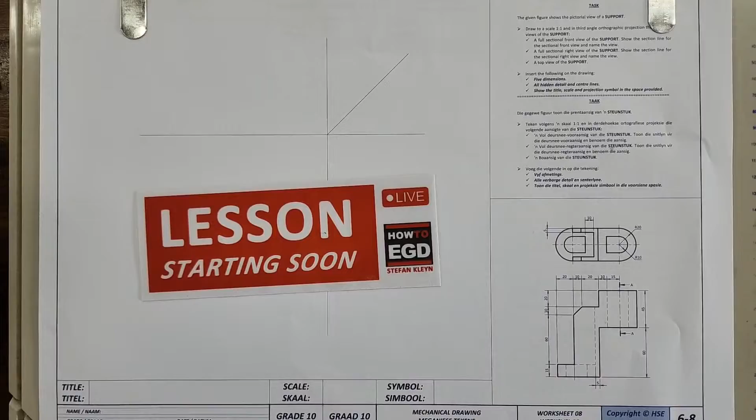Alright, grade 10s, here we go. We are on page 6-8 of the HSE workbook.

They've given us a top view and a front view, and we are drawing it in third angle orthographic projection. We're having to draw a full sectional front view as well as a full sectional right view and the top view of the support, with dimensions, hidden detail, title, scale, etc.

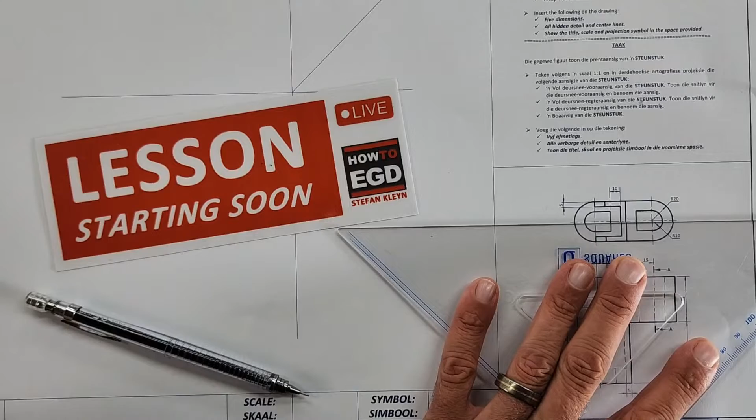Alright, let's just look at this quickly. If we put in our cutting plane here, a full sectional front view, that cutting plane will run through here, yes or no? And the arrows at the end will be on this end.

So if we cut through the support, everything on the side of the arrows will fall away. So if we look at this here, everyone look up at the board.

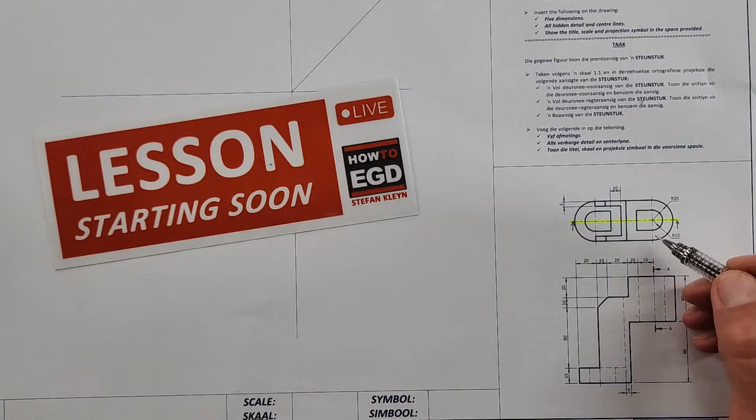This here is a hole going through. Do you see that? That hidden detail lines up, that hidden detail lines up, that center line lines up. So we have a hole going through here.

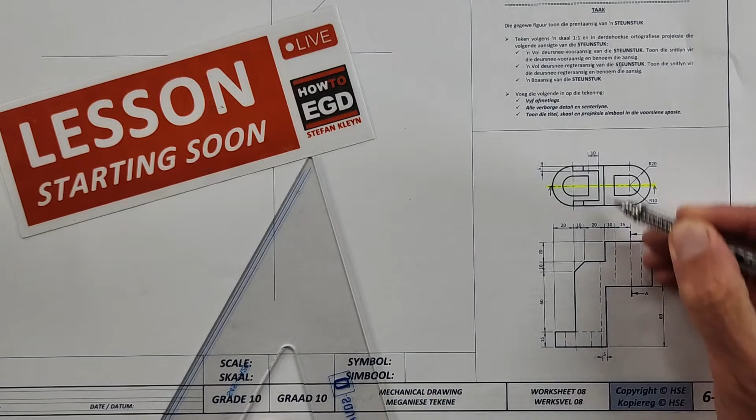Then we have a support part here. This is almost like that cut out there. Do you see that line? This is the corner. And then we come all the way down, and then what we see here is this part.

Here at the bottom, another hole there. That hidden detail is this. Do you see that yourself? Are you able to figure that out yourself?

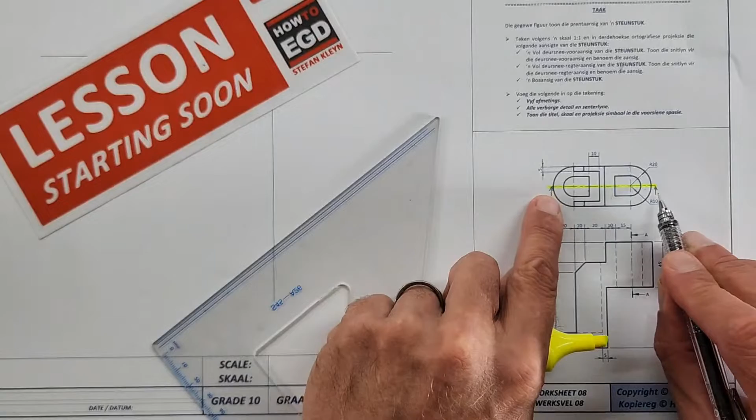So we're going to draw a full sectional front view.

We've got our 45s that they've given us. Oh, there's the 45. This is going to be the right view here, just with regards to placing it.

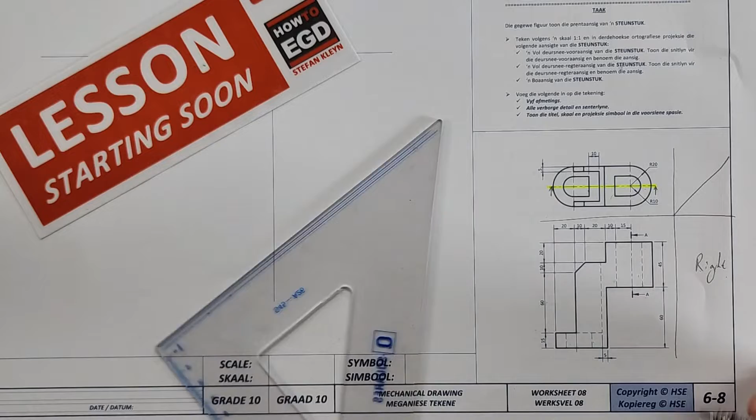And so if we go now to our page, where can we start this drawing? We know this top corner. We can put this into a glass box almost, and we can get that corner. And it's going to be 10 millimeters away.

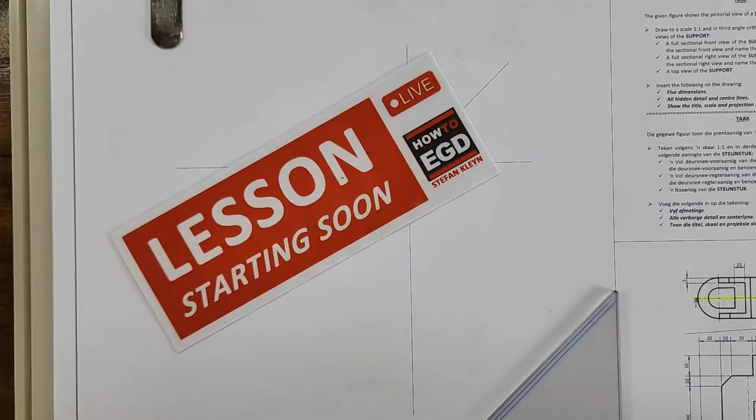No, let's move over here to this side. We're going to use what is given, and we're going to start our drawing.

Alright, just make sure your paper is lined up, and then we can do our 10 millimeters here, just in construction.

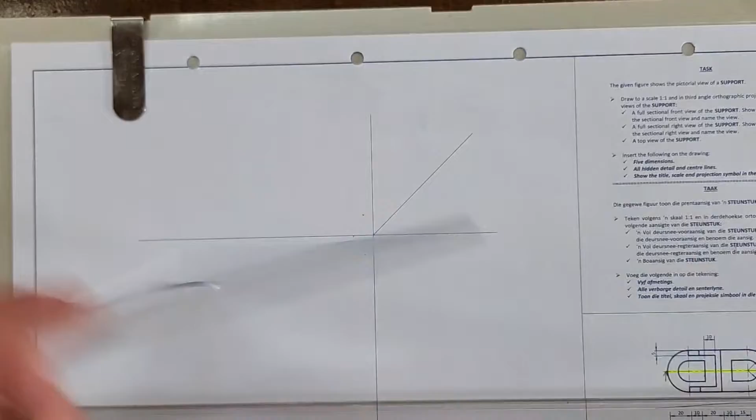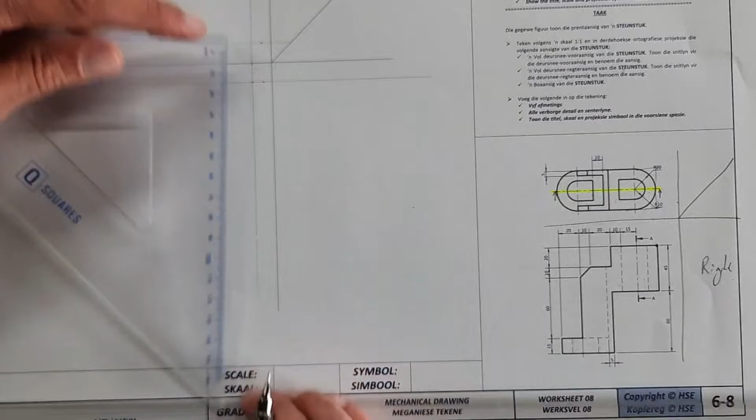Okay, so this corner here is on this top, on the front view, this corner. And there's a lot of measurements here that I can already start with. So let me just start there, seeing that I like starting with the front view if I have a choice. And in this sense, we have a great choice.

Next one is 60. That goes all the way here to 120. Okay, that's the one side. I'm going to just take a moment and draw those lines in construction here.

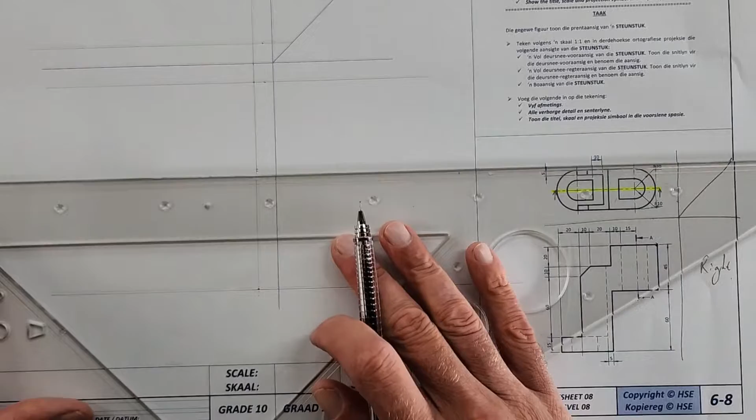Okay, then its width, we'll have to add all of these together. So they've given us 20, 10, 20, 10, 20, 15. But what about this distance? Where do I get that distance here? Where am I going to get that distance to reach the end?

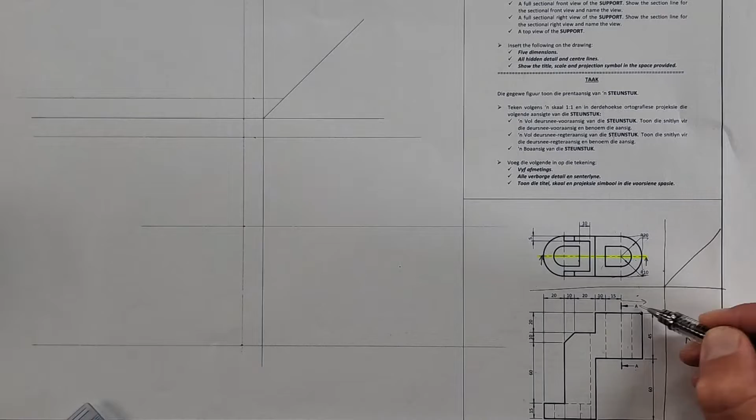I'm going to have to use another view. And if you look there, it says radius 20. So that means this last part is also 20. So if I start here, I can now move back.

I've got my 20. How many of you are feeling like you're gaining confidence with these drawings? Who of you feel you already have confidence, sometimes too much? Do you also feel you're growing a bit in your confidence? You feel that you are moving forward, right?

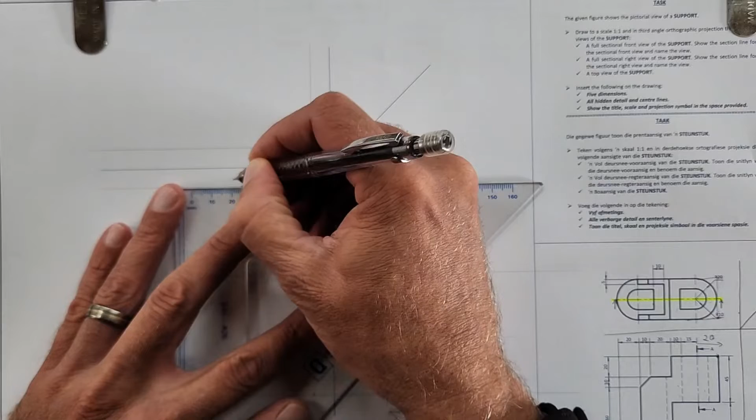Alright, so we've got the 20, then we've got a 15, then we have a 10, then we have another 20, and we have another 10, and the last another 20.

Okay, so we can use that. Let's draw a couple of construction lines here.

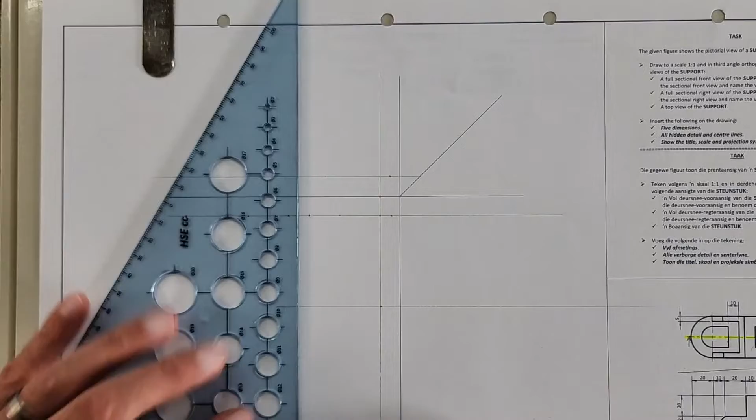So we are just doing what we did right at the beginning. We are creating a grid in construction. Do you agree with me? We're just creating a grid, and that's helping you to draw this.

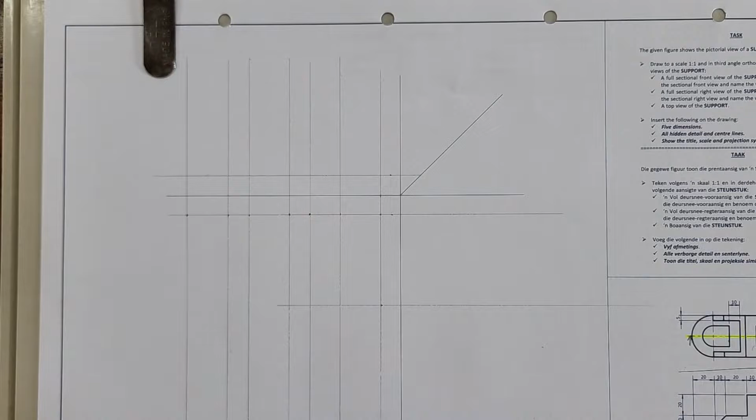And now I can go and I can possibly almost finish this drawing. So we've got the 20, then a 15, then a 10, then it's to the top. So I'm going to draw this in nice and dark.

Okay, here we came down with that 45. Alright, here's a 20 down here. We can draw that in. Step of 20.

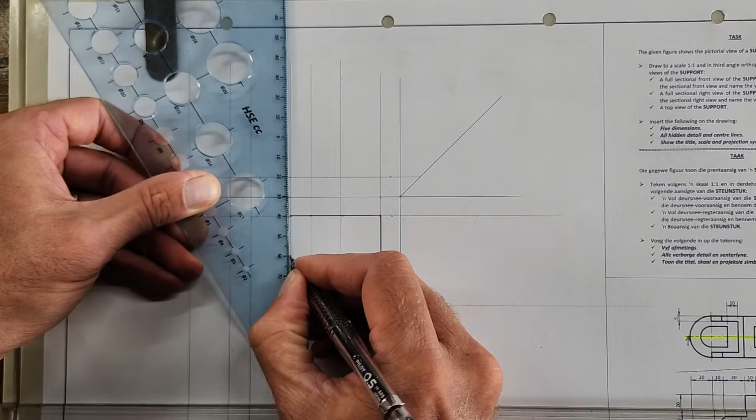Then there's a 20 to the left. Alright, this corner here, if it's 10 in one direction and 10 in the other direction, what do we know about that angle? It is at 45.

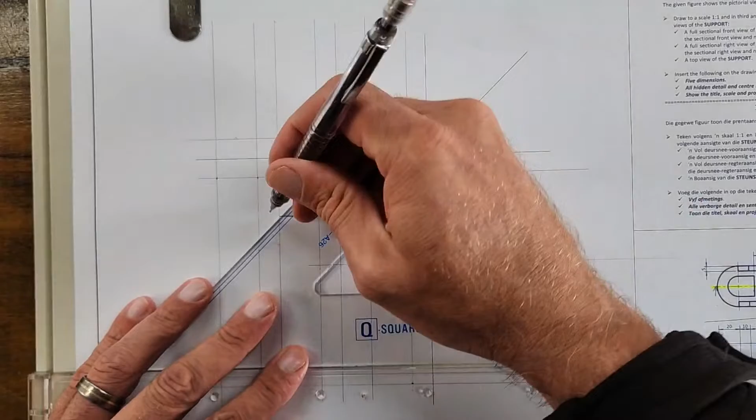And then it goes down all the way to the bottom. There's a 15 here on this side.

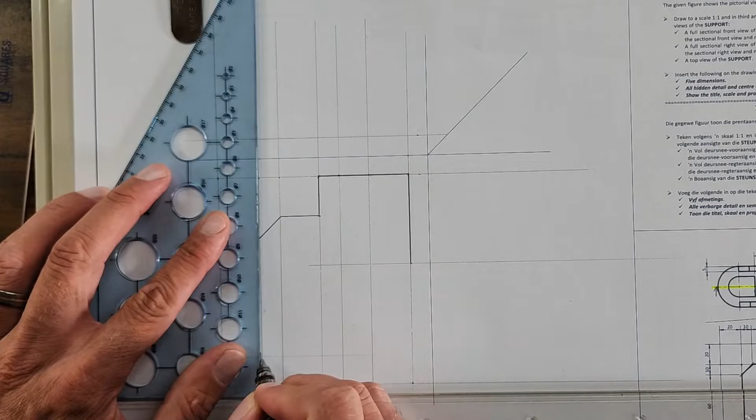And oh man, I really wish you could keep up. Who of you is keeping up? Nice. Alright, are you feeling that you're also drawing a bit quicker than you did 2 weeks ago, 3 weeks ago? Do you feel with the confidence you're also able to draw a bit quicker? I hope so.

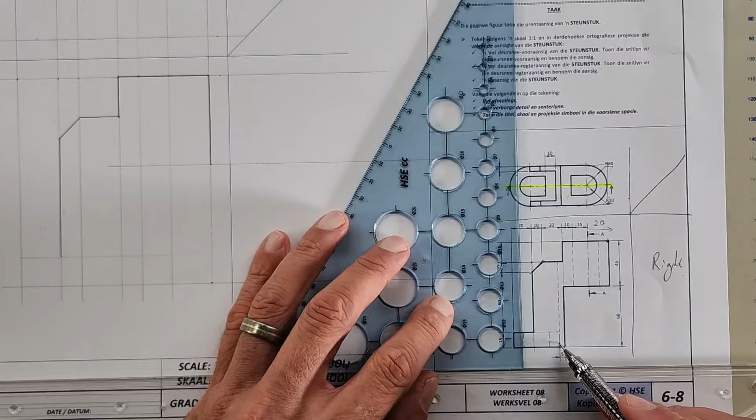Okay, here we just have to double check how these things are lined up, because we have this line 5 millimeters into it. There's another hidden detail which is just that thickness there. So we have to keep that in mind.

So here is the one part. We can draw that up. Okay, and across.

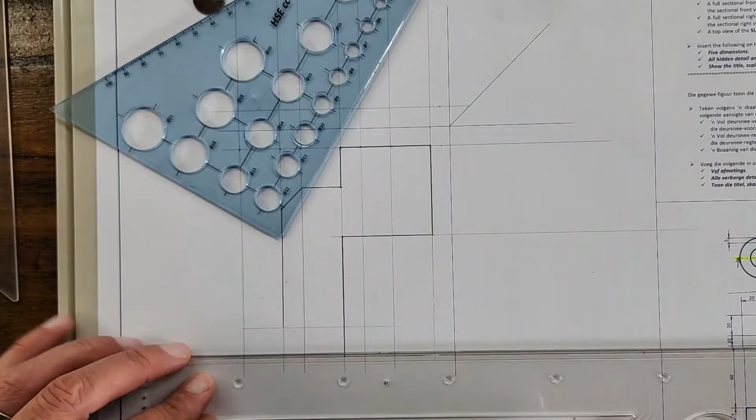Okay, so just drawing the outlines here, and then here's that 5 millimeters. That's an interesting one, 5 millimeters. It goes, it's hidden detail, but it goes up all the way. Just look at that hidden detail on the given question.

It becomes now a solid line. It's this inside here that I'm drawing. We're going to see this back part here. That corner there is this line. All right, and then it comes across the base.

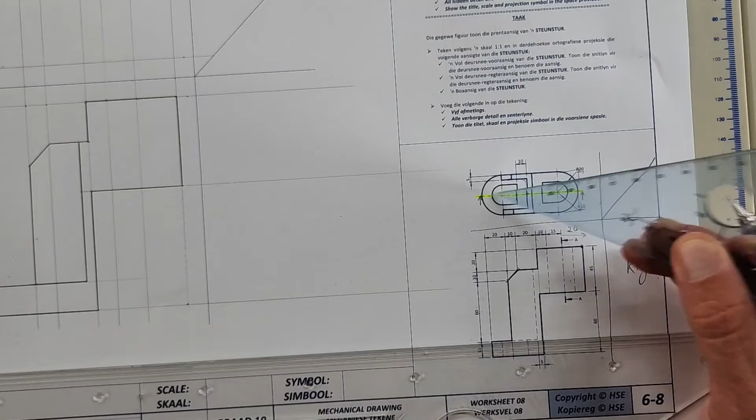The radius from this center to there, and that is going to be the same. It's going to be that 20 and that 10. So the outside is 20 already. There's another 10 here.

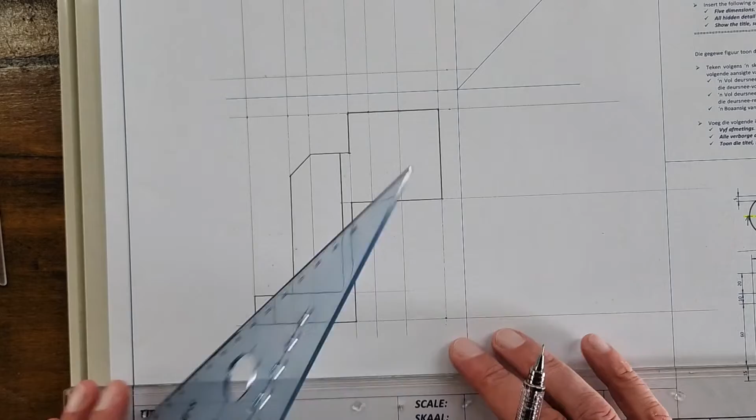I want to just smoothen my corners there, and then that. I just want to get this line. So there it is, it's that 10 there, from here to there, also another 10.

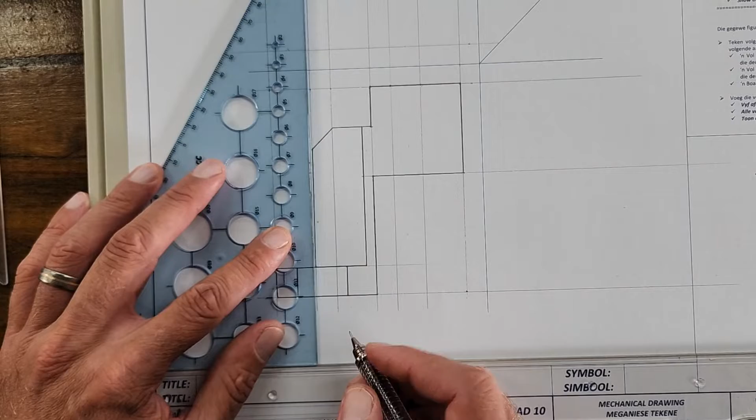Okay, so we'll do our hidden detail just now, in a moment. This is in line with that center of that arc, so we'll do a hidden center line. Okay, then here on this top, we also have that 10 on this side. And from here also we have a 10, that one we've already drawn in.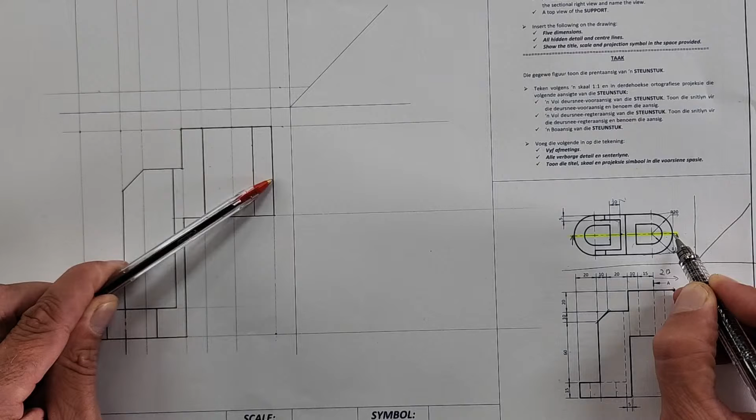Then I cut through this part, that's that line. Then I cut through air here. There I still have to do the center line. There I am. Then I cut through this first part, which is here, but there's another 5 millimeters here.

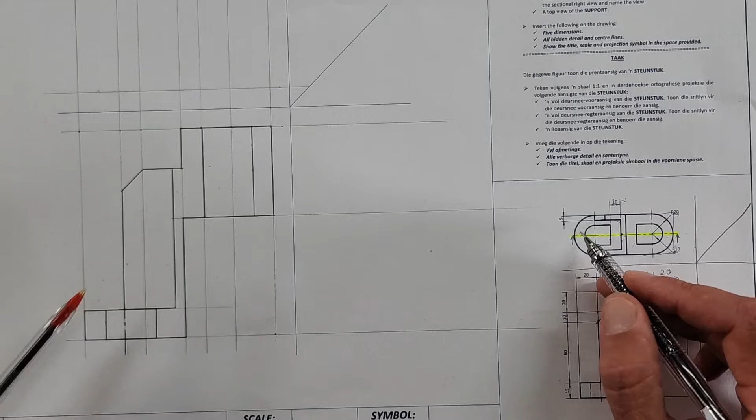That goes all the way down to the bottom. When I cut through this, then there's another piece of air and to the end there. This at the back is this, that side here that I see. That angle there is this one.

Okay, yes or no? Yes. Happy, all right. Here we have a center line.

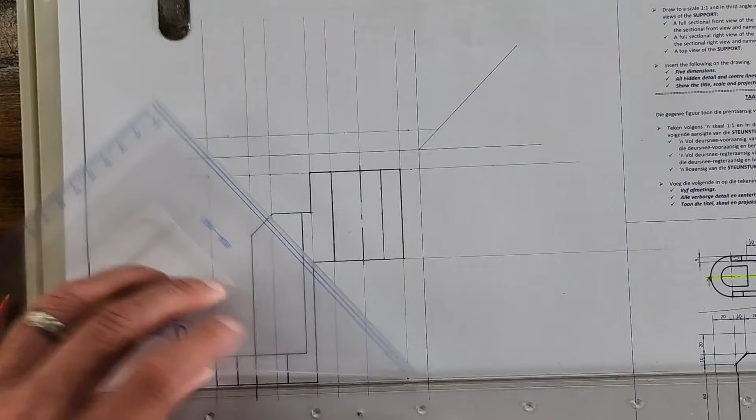Okay, we'll do the hatching in a moment. Maybe let's do it now. All right, you can choose which 45 you choose, I'll just do it this way. Right, make it nice and big. This is a bigger drawing, so your spacing can be a bit bigger. Just as long as it is consistent.

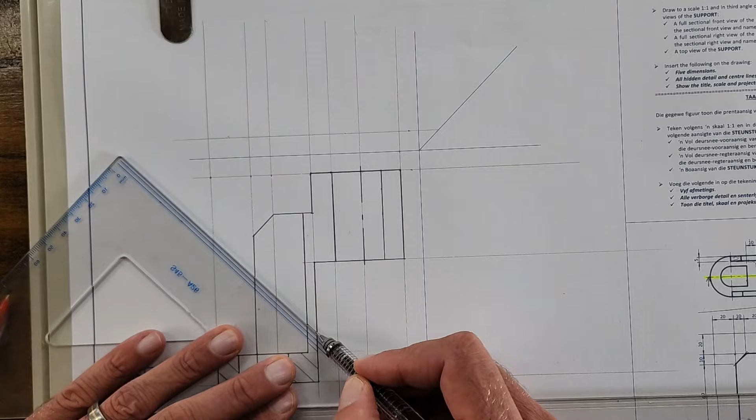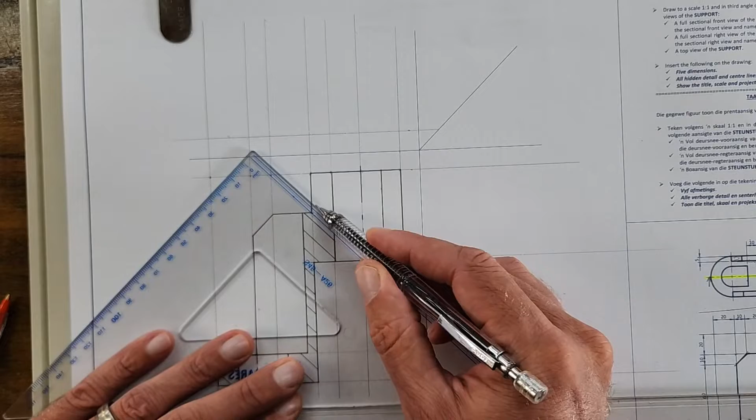If your ruler doesn't have guides like this, you can use these as your spacers. You only show the hatching on the parts where it doesn't cut through air. The moment it cuts through air, there's no lines.

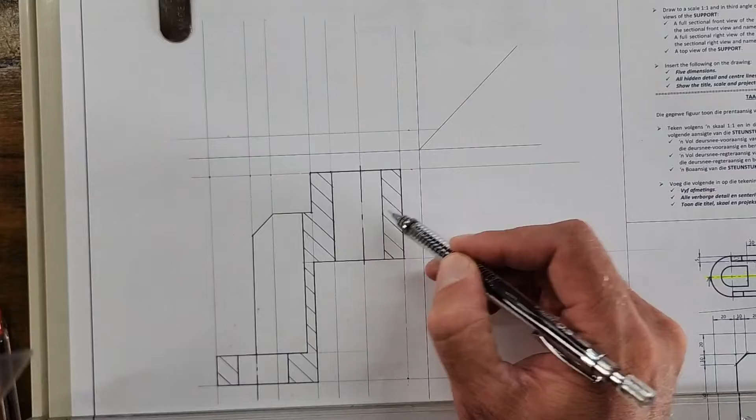There's other rules also, of course, with regards to hatching, which I'll teach you as we go on. But for now, this hatching, only the part. So this hole here, cut through air, nothing there. This is at the back actually, it's that back part there, so you're not going to cut through that as well.

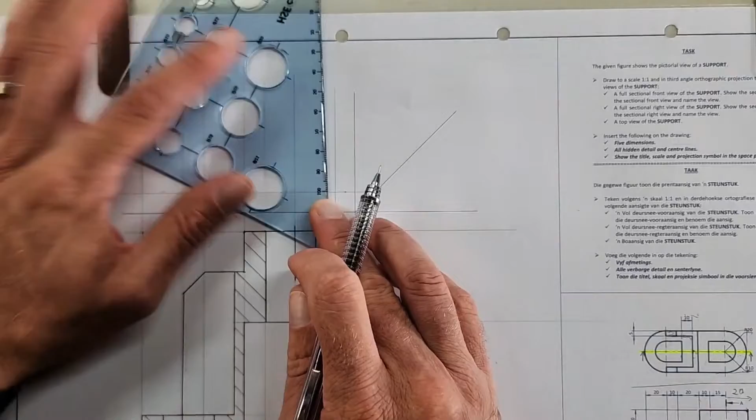Alright, that is our front view. From here we're going to project our top view. Now our top view has got a total of 40. So you're going to make your mark at 40. You're going to have a center there at 20.

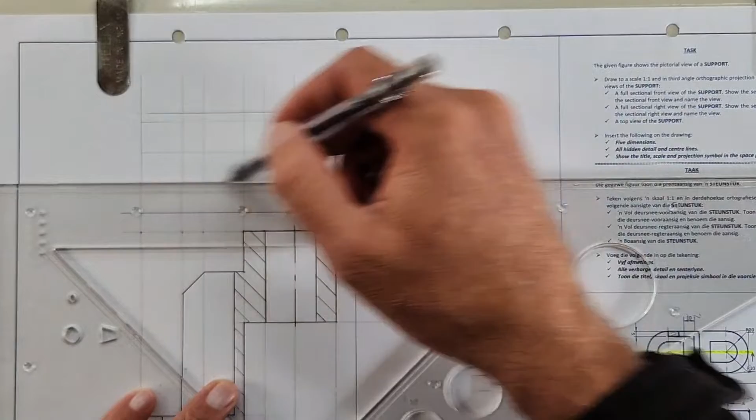There's a 5 on this side. There's a 5 on this side. I'm just using the measurements that's given here, that we can now draw across to our 45. Okay, and now we can start. Is it just a plain top view, or do they ask for just a normal top view of this?

Okay, so let's start with our circles. Here's our center line, that should line up with all of these.

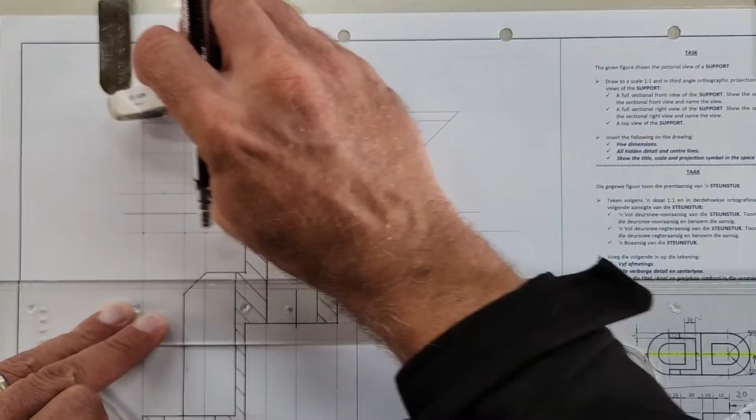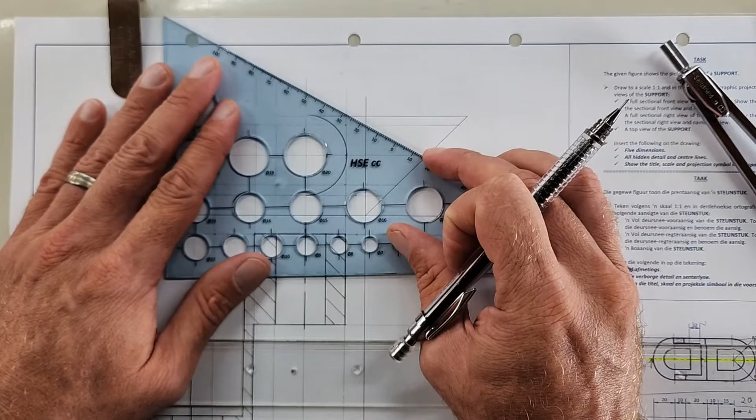Okay, and then there's a 10 millimeter radius, 10. I'm going to see if I can use this one. So if you have a stencil, you can use it also. Make sure these 4 corners line up.

Sometimes you struggle to draw such a small circle accurately, and so if you do have an HSE triangle like this one, then it is going to be helpful in drawing that.

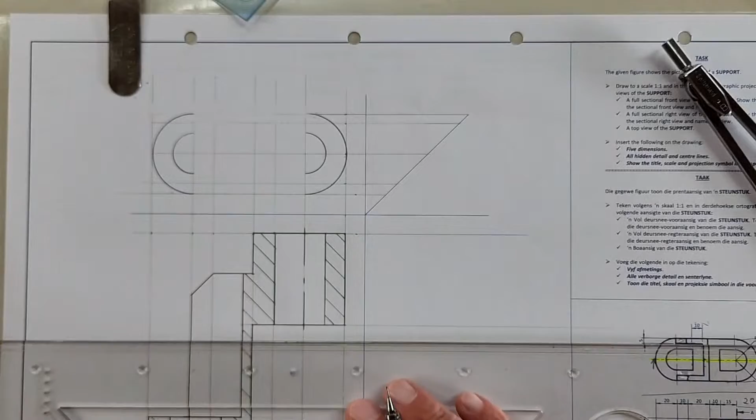Okay, now we've drawn our lines up, so it's very easy now to finish your top view. You can do this end. If you've brought this up, this corner up, you can do this end, that end.

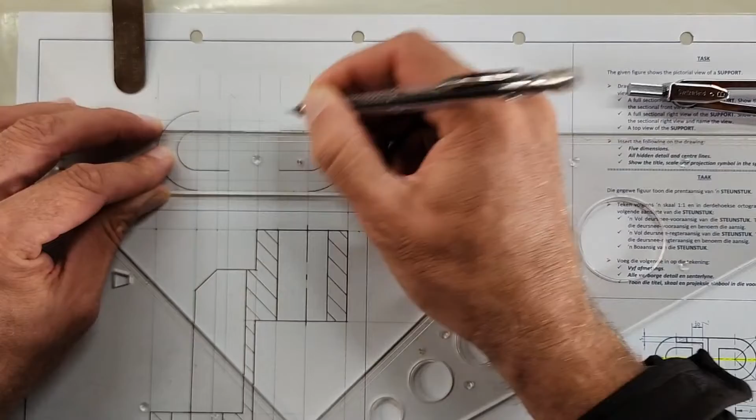Copying that front view.

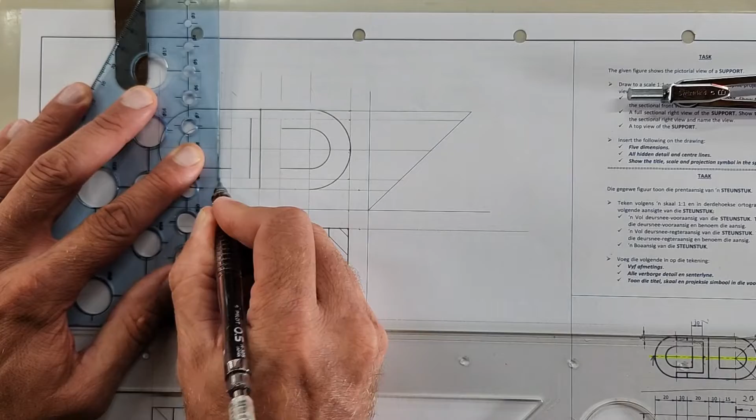Okay, so I'm just drawing with confidence that which is given to me. This is just a plain top view. I get the measurements from projecting it up, or even from what is given to us.

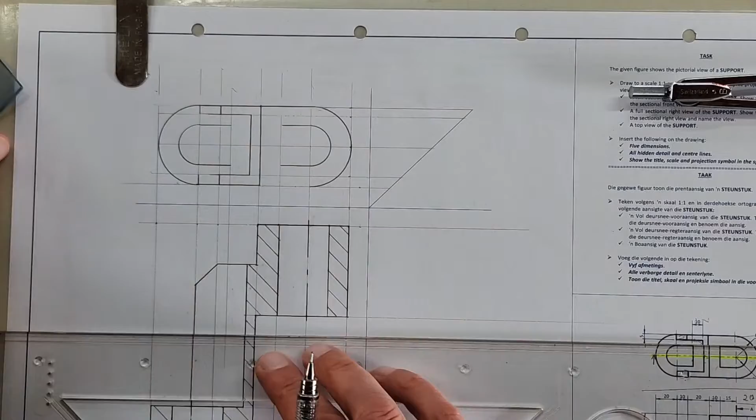Please make sure you draw these outer lines nice and dark so that it's clearly visible. There must be a clear distinction between what is construction lines and what is your outer lines.

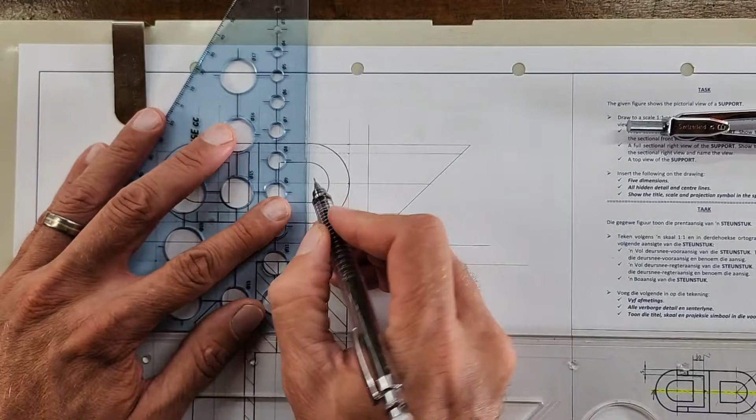Okay, the other thing here, of course, is going to be a cutting plane, but we also want to make sure we have our center lines drawn wherever there's an arc. Alright, this one's going to be our cutting plane.

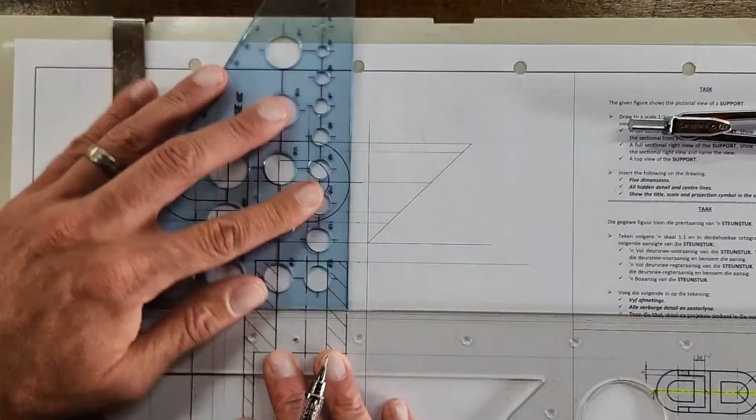Okay, so you can add that in. They did say...

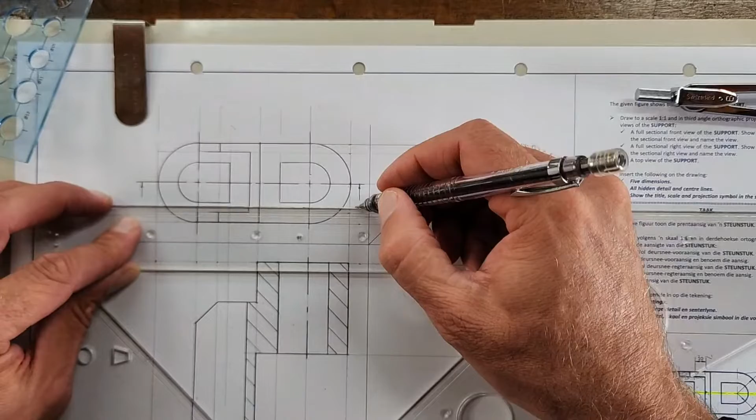Okay, so with EGD, reading your question is very important. I probably haven't spent enough time addressing it to you. In this actual question, it asks us to draw the cutting plane for the sectional right view. Where do they ask us to draw that cutting plane?

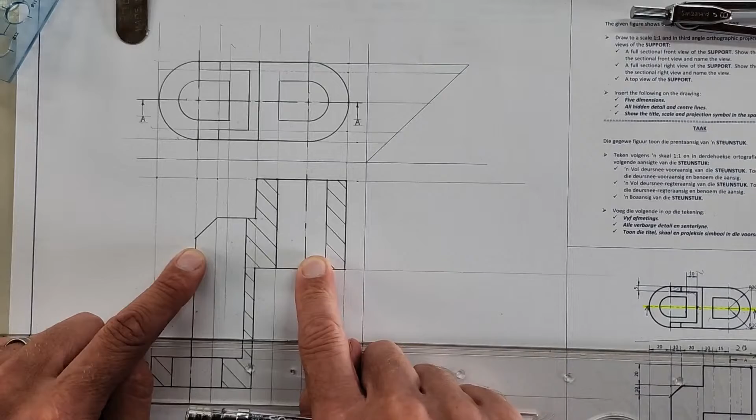Did anybody notice? This is the section plane, cutting plane for the front view. Where do they want us to draw the cutting plane for the right view? They give it to us in that question. It's here. Do you see it specified?

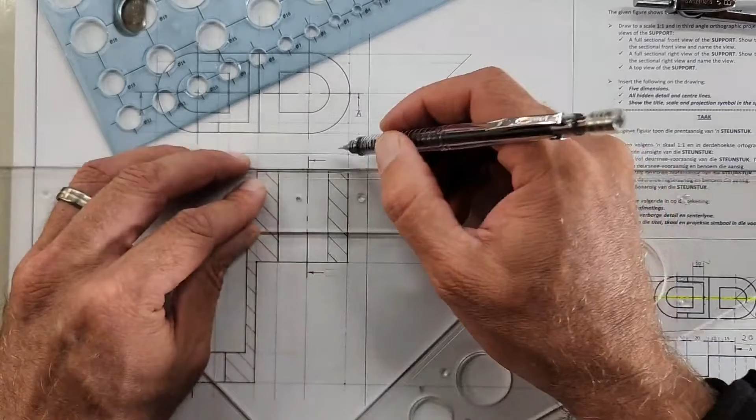Okay, so you're going to add it as it's given. Alright, and then label it. This is actually, I've flipped my AA and my BB. This should have been AA. And this, okay. Alright, happy with that? Any questions up to this point?

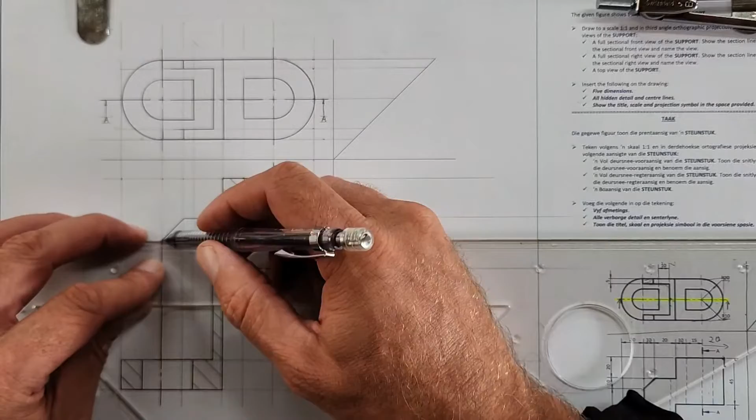Thank you very much. And from here, project everything down. And you don't even have to think. You are just going to complete this now with confidence. No stress, no anxiety, no worries.

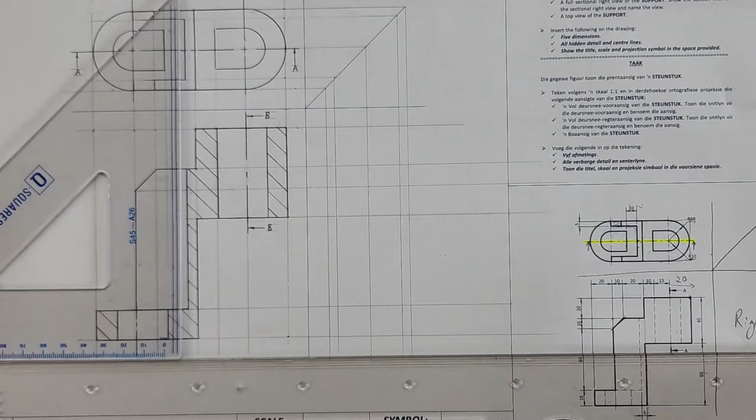Right, if I go here now, if I look from the right hand side, I'm going to look into this entire surface here.

Okay, and it's going to go all the way up. And if I look, although there's a curve here, if I look from the right hand side, it is a solid line. So this can go all the way up. This can go all the way up.

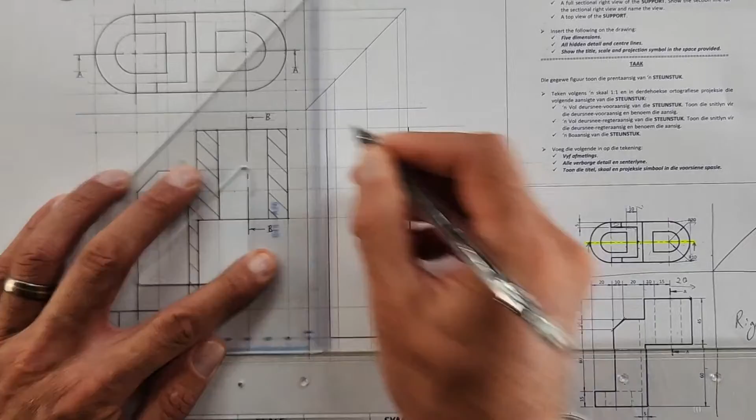This corner, remember, if I cut on this cutting plane, everything on the right hand side falls away. So this corner here is this line. There's a corner here. Okay.

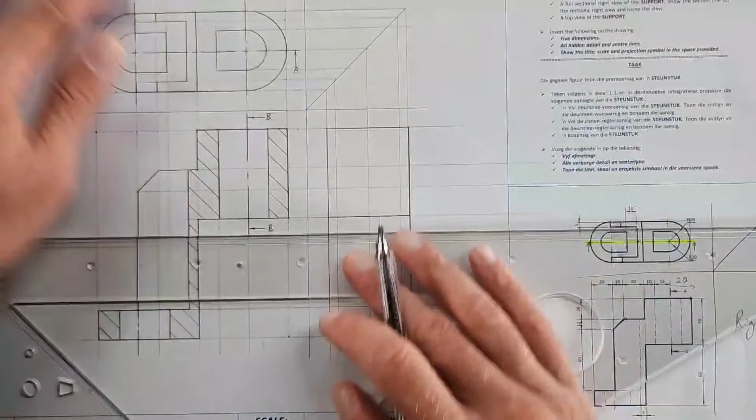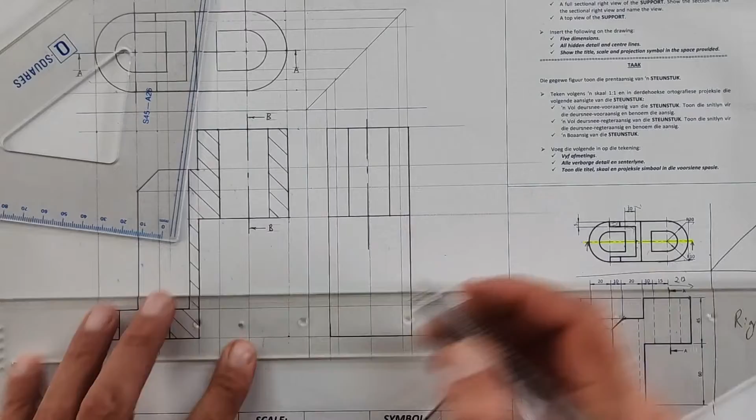Then the width, sorry, I forgot about that. Center line. Alright, then my hidden detail here, behind there's a corner, so that's hidden detail.

Okay, we have going up here on the side, hidden detail, all the way to here on top, but we're going to stop behind that section.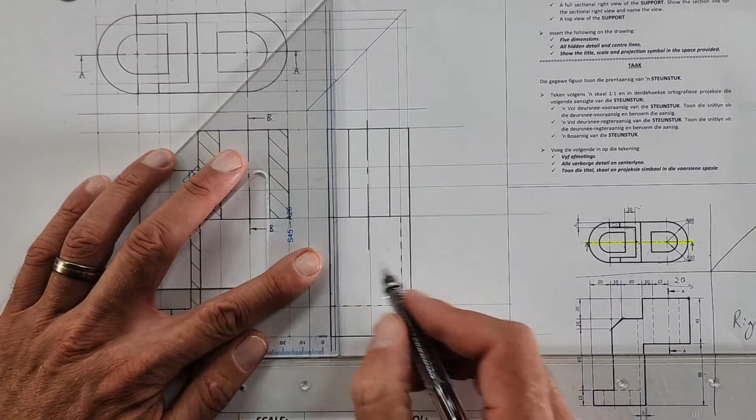Alright, and then the width of this hole here, center line again. I could have just probably extended this one.

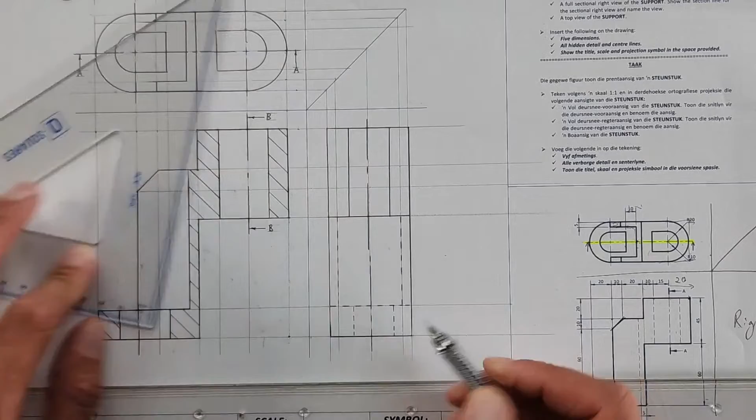So these two lines is actually that hole if I look from the right hand side. My accuracy is a bit warped here. This line is that corner going up.

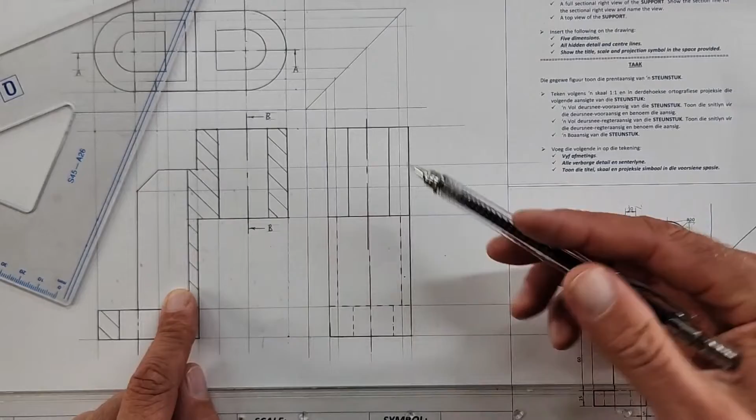This is this side. Remember, if I look at it from the right hand side, do I just draw half of it because this was a full sectional front view? Sometimes learners do that and they just draw this side of the drawing because remember the front half is gone on that view.

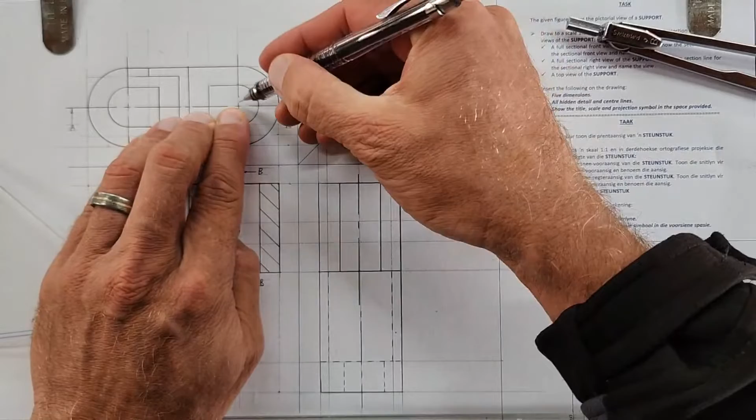But you don't draw it that way. You still draw it if it was full and you would have cut it through and looked at the full part. Because that front part is gone, you don't just draw this part here, you draw still that full face. Alright. And then the same direction, what do we cut through? Well, we're going to see here on the side, keep the spacing the same, please, angle the same.

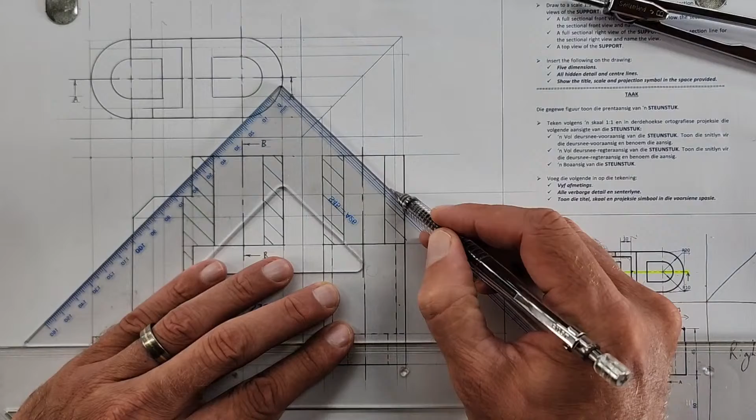Okay, so some of the important elements that I want you to remember. Hidden detail - don't put hidden detail behind hatching. You can, I know maybe I've said it differently in a previous lesson. Don't put hidden detail behind hatching, but keep the center lines.

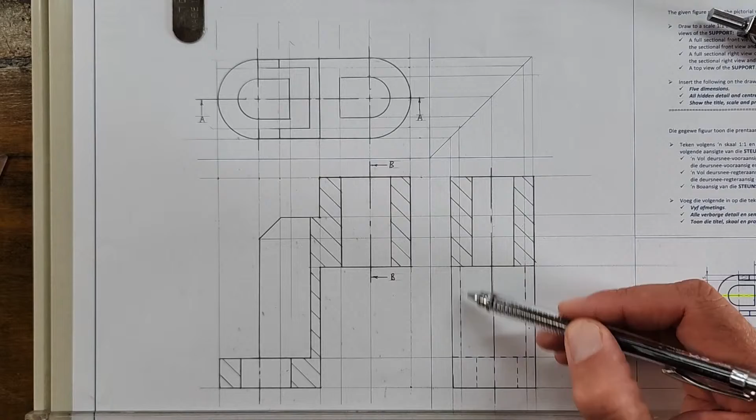Alright? And then hidden detail, of course, of this part which is not sectioned, that you do show. Make sure your outlines are nice and dark, really stands out.

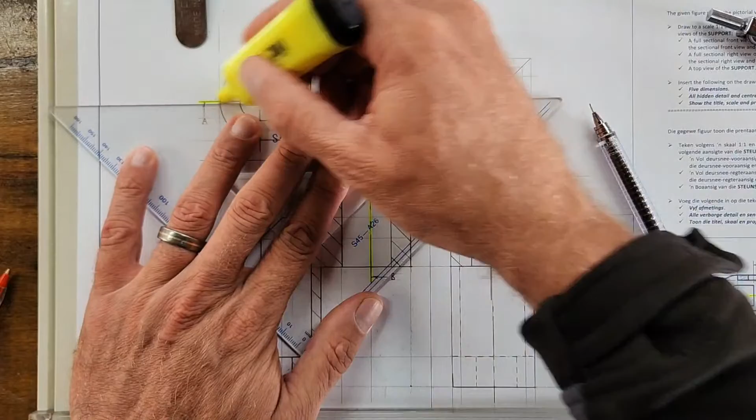What you still have to remember is these cutting planes, the AA here and the BB. Let me just highlight that for you, please. Don't forget these. And they still have those arrows going with them.

And it's the side of the arrows that falls away for you to look at that right view. Same here in the top. It's closest to my eye that falls away to be able to draw this one.

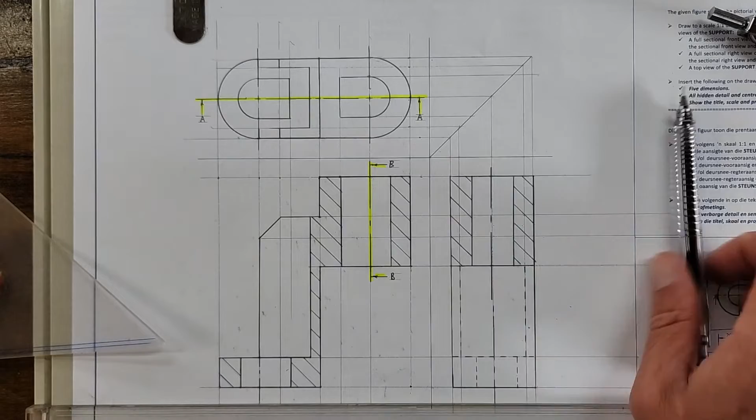And then on this also, you are still required to do your measurements. The dimensions needs to be added. And the title. Here, full sectional front view. And here, sectional right view.